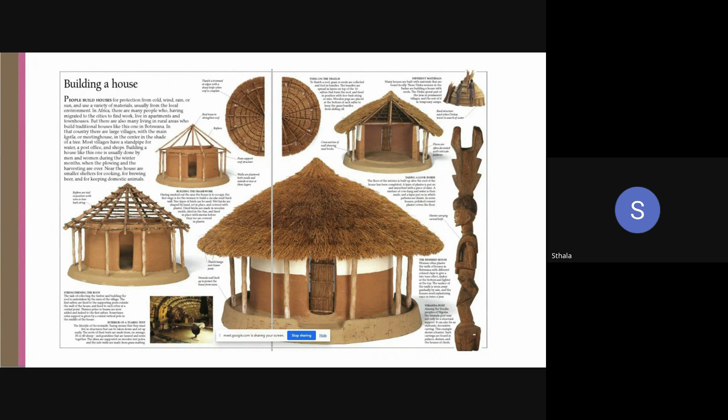It was really that thin layer that separated them between the inside and the outside world, purely a structure built for collective survival. The materials were very common, easy to source, and the fundamental theme was collective survival.

The idea was how can we separate ourselves from the outside world, from the weather, from the animals, from anything harmful, and just provide a space which is warm and easy to accommodate for the family in whatever climate they were in. The hunter-gatherers kept moving, so they didn't have the idea of permanence—it was about creating the simplest structure in the quickest way possible to house the family and give warmth.

So a simple structure would have the female side on one side, the male on the other. You would have the ceremonial hearth, where the central heat of the house is generated, and small corners where the woman or the man would be seated—but it was all the idea of collective survival.

Everything used to happen in one space. The same space was used for warming, for making food, for drying grain. Occasionally livestock were also kept in the same location—if there were cows or chickens, all of them were housed within the same shelter.

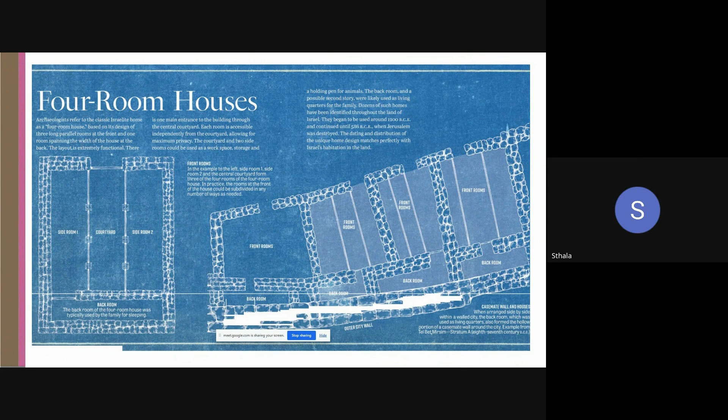For example, in this house a woman would be bathing the child while the cattle would be at a corner, and in another house maybe the cattle is in the middle. So there was never a primary function given to the walls or separations that were created—it was more the idea of segregating spaces that evolved.

As we move forward, especially in dwellings in Mali or even in early civilizations like Riyadh, you start seeing that this slowly evolved into specialized rooms. There was an idea of having a living space where people would gather, sit, eat their meal, talk to each other about the day. There would be an idea of a granary to store food, and also the idea of a bedroom with the specialized function of only sleeping. So there was suddenly the main factor of privacy, which became fundamental in how the housing developed.

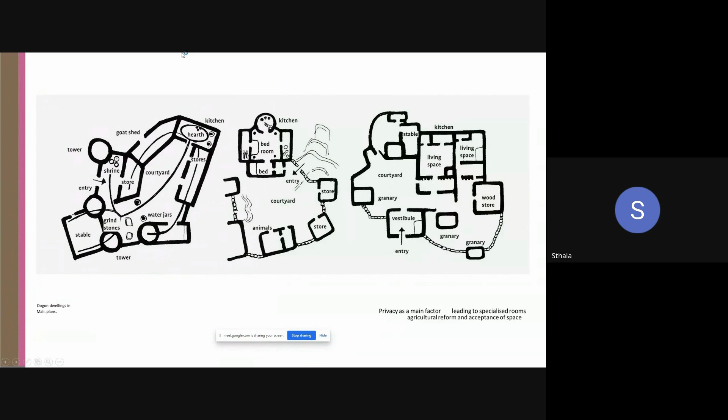As the agricultural reform came into picture, the hunter-gatherers slowly started accepting one space as their own. That is what led to the idea of, if I have this one space, I would like to have multiple specialized spaces within it in order to aid a certain function.

As you move forward to the next century, the idea of permanence seems to settle more in how people are building their houses. The use of rock, the use of closed spaces, the introduction of fenestrations or windows of different kinds to cut out the natural light starts becoming a theme. Suddenly furniture starts to be something they introduce into their houses as well.

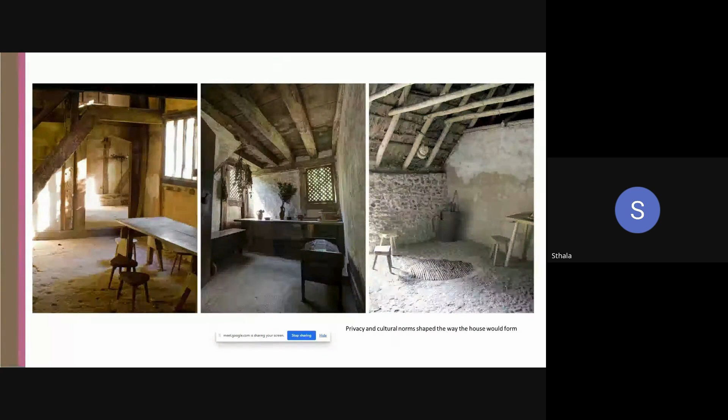The privacy and cultural norms form a way in which the house would slowly develop one by one. As you move forward, although the house becomes the private space where they inhabit, suddenly the public spaces become a place for people to gather as well. The Roman baths, for example, very well known for women to gather around, have a central space where bathing would happen. The same with the Turkish baths, or the step wells in India.

This changing evolution also led to how the external amenity spaces that each of these civilizations perceived also grew. You can suddenly see that amenity spaces became secondary spaces from home, where people would move out, and the city would become an important part of the development as well.

Another really important milestone towards housing development was the introduction of corridors. As colonization came into picture, and as the idea of classism came into a lot of European culture, the objective was that servants or slaves were not required to traverse through each and every room. They could move only within the corridors, and the main inhabitants of the house or the aristocrats were then present with their own specialized rooms, and they would just go in and out as needed. That's when corridors completely changed the way that people could live.

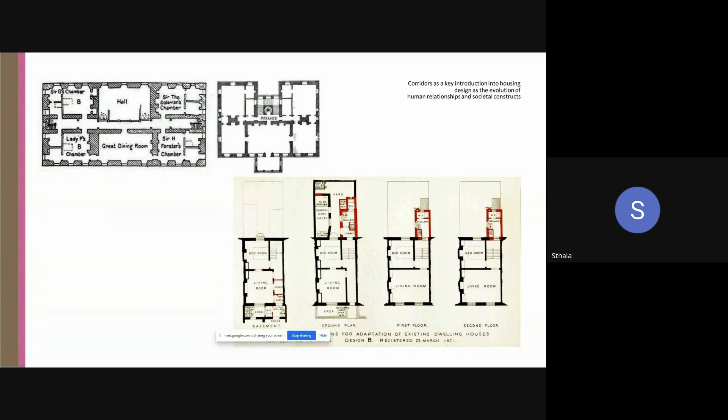How can we then go multiple levels using staircases, and how can corridors aid a kind of living where there was a segregation caused by class? The societal constructs and human relationships that were built in that era were fundamental in the development of housing at that point.

As we hit the early Renaissance era, people started personalizing their space. It was no longer just about the walls of the house, but the grandeur of the house. It was about the culture they came from and the culture they are staying in. Suddenly it's about how we can create spaces which are more personalized - how can we get artifacts from our hometown, or bring artifacts from where we are staying into our homes, and create that sense of grandeur or extravagance using these houses.

That's how each space then started getting its own charm and character. The living spaces were decorated in a different way to the dining spaces. The more public spaces were decorated with slightly more grandeur to show off, whereas the more personalized spaces were done so in a different manner - probably charting the first evolution of how interior design came into picture in housing as well.

As we move forward, we then go into the Industrial Revolution, where the idea of man going to factories or going away from their home as part of their work became an important factor in how housing was formed.

When men used to go to the industries, they were completely covered in dust, and they had to come back home and wash themselves. Therefore, the evolution of the bathroom, another private space where the man could wash off the dirt away from the children, away from the rest of the family, so that they are not polluted at the same time. Sanitation became one of the main reforms as part of the Industrial Revolution, and that led to the importance of specialized rooms and their uses.

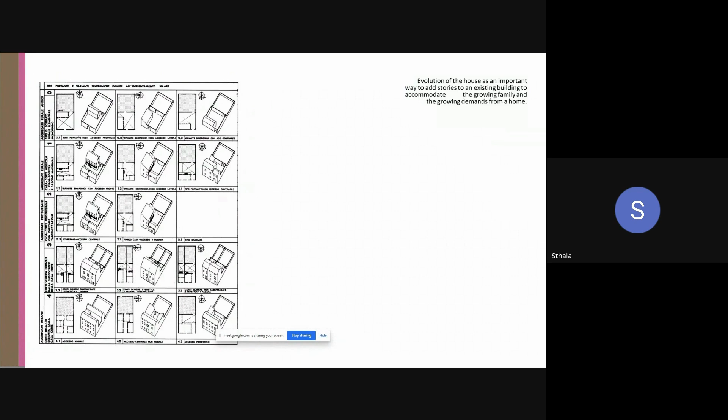That led to the evolution of how city planning has been influenced by housing design, especially something you notice in European cities. That was also an important aspect of the staircase, how people move from one floor to another, and how that led to privacy. Each floor had a certain level of privacy as they moved above.

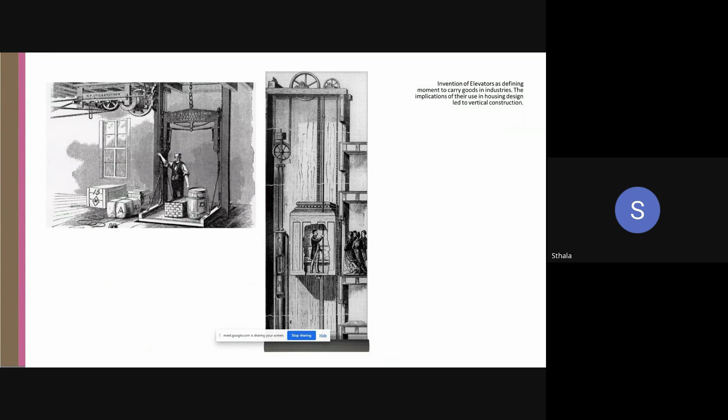And then, obviously, one of the most important factors was the elevators. Elevators were usually used only in warehouses, where they took very heavy loads up and down for goods and materials. But the utilization of those elevators in the housing context enabled the housing to go more vertical, predominantly seen in the US, where you can see New York, Chicago, those kind of places where the elevator gave them the ability to go vertical and wider.

Therefore, more houses could be accommodated within a smaller space, more blocks could be accommodated in a smaller space. A lot of manual elevators also existed back then. This is one of the oldest ones in Chicago, which then gave people the opportunity to spread across different floors as they go on.

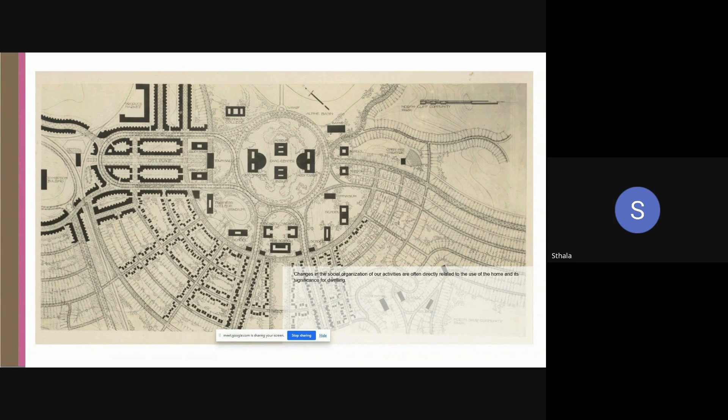So the women were confined to these areas, and they would leave their children at school, for example, while the men go to work. You can see how housing design has fundamentally played a role in how citywide planning or citywide scale has been developed in different areas.

Cut to the 1900s and the post-industrial revolution, you can look at modern homes where the introduction of automation was the key factor in how homes were developed. Suddenly, there was no longer a requirement for coal to be burnt. Therefore, there was no need for the kitchen to be segregated from the rest of the house. You could have an open plan kitchen right next to your working area, because the machines used to do the majority of the work, from cleaning the vessels to cleaning your clothes.

Open plan became something romanticized with the idea of automation and the industrial revolution. Moving to today, we've come full circle along with technology, where you now have smart homes, where everything can be controlled with one device, from your Wi-Fi to something that's making your roti. Each sort of space or amenity we saw earlier, split out as bathing areas or gymnasiums in Rome, suddenly now they are part of the same house.

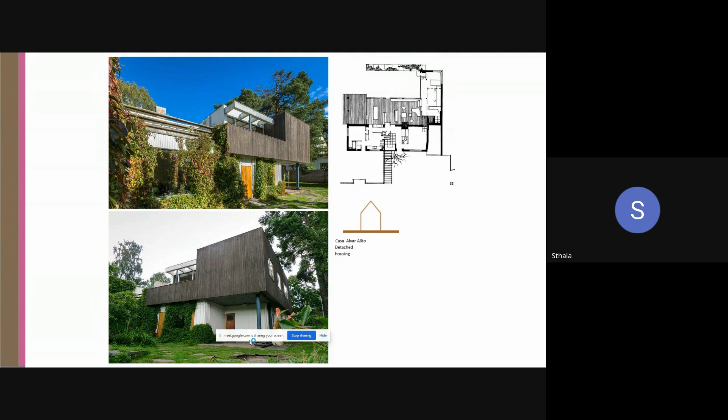What you can see is these facades, along this image. The facade is quite transparent to allow that interaction with the outside. So when you're looking at spaces like living rooms, dining rooms and kitchens, they might want that sort of external interaction. But the minute it comes to other spaces, like bedrooms and bathrooms, or other private study rooms, they would want more permanent built walls around that area. So you can see the difference between this facade and this facade. That's where we start categorizing how each of these types get differentiated from space to orientation and the amount of exposure they have to the external side in terms of facade treatment.

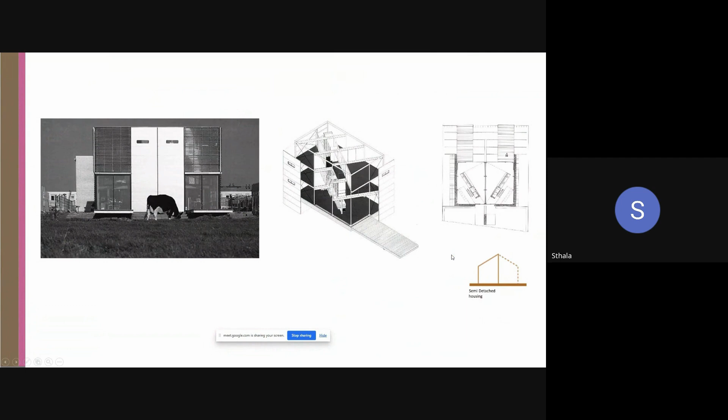As we combine multiple zones together, in this case we look at this as a single zone, and then we move on to semi-detached housing. You start combining two of these zones together, and you create a sense of interaction, encouraging people to interact between these two units. So you start having common spaces, as you can see within these areas, within back gardens or within those back zones, and a sense of interaction is developed within those areas.

Similarly, as we move forward, you start seeing combination of multiple units or multiple zones being put together. Here, what we're seeing is clustered housing, row houses, which are combined. As I mentioned earlier, there are several factors: space, orientation, and facade treatment. Orientation is for the amount of light pouring into the units itself.

The space would be, say for example, a few people would like their dining space to be a private space, not with a lot of interaction outside. So then you look at areas oriented in a way that the amount of light pouring into those zones can be designed or structured around that. Similarly with kitchens or living rooms. This starts depending on the kind of culture you've grown up with, or what you want to show or project as part of your living. That's where open kitchens come into play, which creates a certain sense of space and also a sense of culture within that area.

For example, here we're looking at a unit that's vertical in dimension, say 6 meters by about 10 or 12 meters in width, oriented towards two directions, with a larger part of the openings there. So certain uses are structured towards the area where there's a larger opening, and certain areas which require privacy are oriented towards the area where there's less light pouring in, or no interaction with another unit. So this might face towards the street where there's interaction with multiple people within a development, whereas the other one might face towards the back garden.

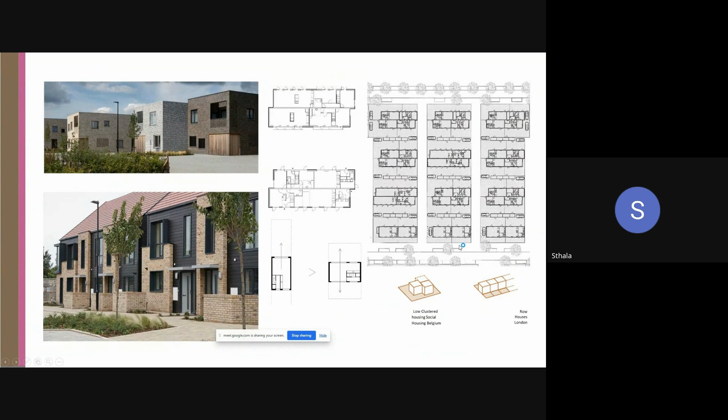Similarly, if it's oriented the other way, with a longer facade opening with a larger opening towards that side—say 6 meters towards one side and 12 meters towards the other facade—then you have a different sort of orientation. So what you see here is privacy tucked in here, but the majority of your units face towards areas or spaces which are open to that sort of interaction that you want with the outer side. That's a decision you would make with housing whenever you're designing row houses or individual units as well.

A combination of this on a larger scale leads to concepts around mat buildings, which is multiple houses laid out together.

Now it raises several questions in terms of the privacy that is set up, the amount of light pouring in. So when you're working with your housing dimensions, it starts coming into play. What is the minimum or maximum dimension that you work with between two facades? If there are opposing units, what are the dimensions you work along with?

That sort of avoids looking into each other's unit, or you would want it the other way where you want interaction. So if it's a living room facing a living room, you might narrow that space down to let that interaction between two neighbors happen. But if you want that to be a private space, you might increase the space between those units, to about 18 meters, or anywhere between 14 to 20 meters, to avoid overlooking into each of these units.

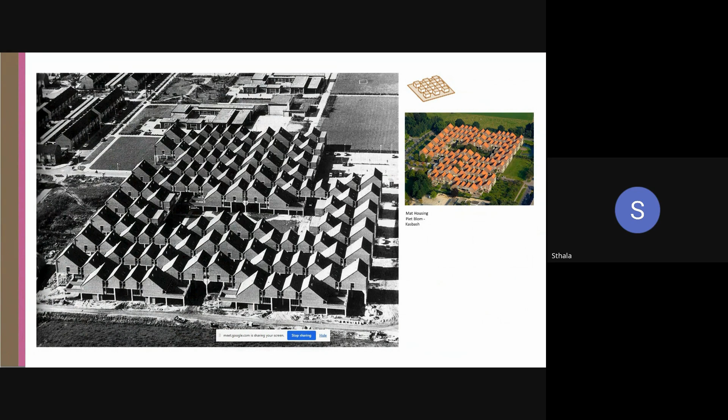So all of this starts playing an important role, and these numbers almost need to be at the back of your head when working out any housing project, in terms of the extent to which you can overlook into a unit, where the bedroom is located, to avoid privacy issues or get that privacy versus overlooking. All of these points come into play when you work on slightly larger units.

Similarly, when we start going vertical, as mentioned, the elevator and staircase have been a major shift in terms of innovation that helped us go vertical. But apart from that, as we go vertical, these units achieve more density, and more density creates a sense of more interaction - not even just a sense, it's a feeling - more interaction within a group, within a community.

So you might have like-minded people staying in an entire apartment, and everyone accepts that culture when staying in an apartment. When you're staying in a vertical building, you're accepting that all of you are going to get the same view, that all of you are going to interact at some point, and that this is what housing means when you're staying in a skyscraper building.

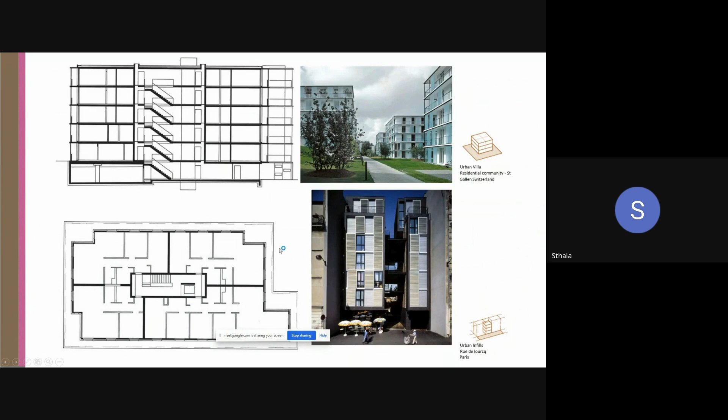So then there are questions around how you create those spaces where people interact. In this case, it's a simple narrow corridor which everyone's houses open onto. But as you split vertically, whether you create intermediary spaces or not, a balcony - a continuous running balcony - or a facade becomes the point of interaction that you might have with others.

Similarly, you also have openings at intermediate levels that can create those communal spaces. In an individual house or housing development, as shown earlier, you'd have common amenity spaces where people would pour into for that sense of interaction. But how do you incorporate that when going vertical, creating density and catering to urbanization, to the influx of crowds coming into each of these cities? All of these start playing a major role.

Now here, the last image I'd like to bring into focus is the size of the openings. As we go vertical, there's also the question of what size opening to give, how much light I want coming into each of these units, and how important a role that plays. You can almost start reading the entire orientation of the house from the facade and elevation. Each of these smaller openings seem to me like openings towards bathrooms, ventilation units. Then you start having larger units here, which could be the living room and dining room.

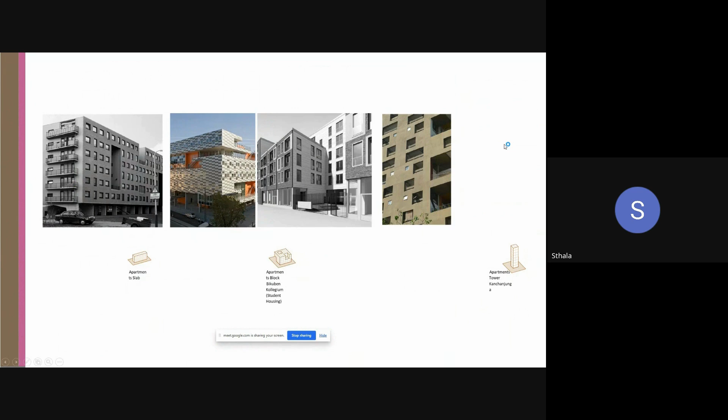So the elevation starts giving you a sense of what the arrangement is within the entire tall building itself. So I'll just reiterate this, where we talk about size, orientation, surface area, exposure in terms of the facade, and how all of these start playing an important aspect in whichever housing you do, whether it's a courtyard block, a point block or a slab, or even an individual semi-detached or detached house.

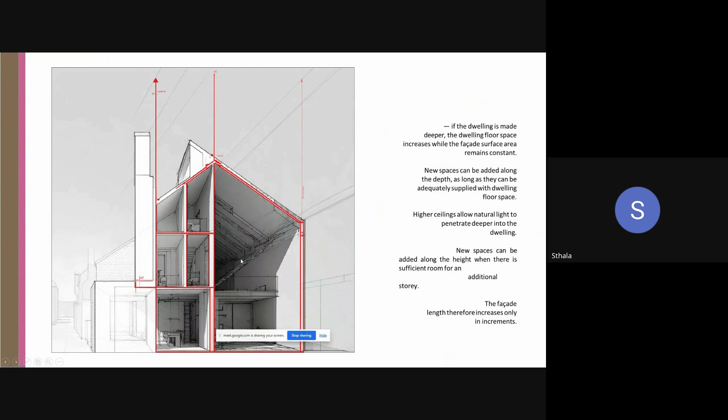I just discussed this point earlier, but I think what this starts showing you is when you work with certain facades, the amount of light pouring in, you almost start looking at those spaces with lesser amount of light, fixed with certain activities and fixed with a sense of privacy within those zones. So it starts working along those lines with whatever housing units you might work.

I'll go through a quick combination of the type of blocks and how each of these come into play.

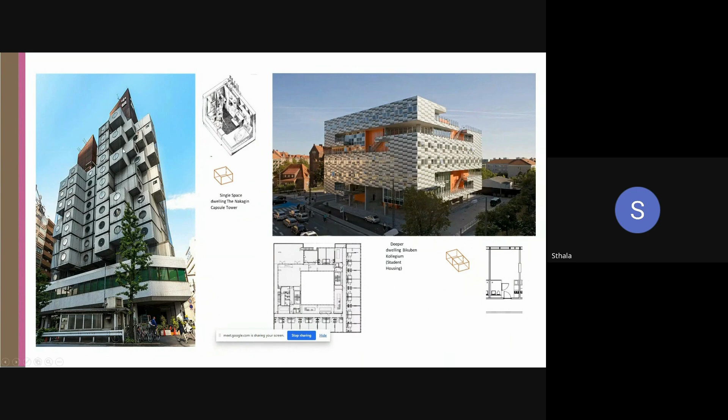Now, these are single space dwellings where the orientation of these are all single oriented towards one side. So what you can almost see is within the back of each of these units, you start seeing a corridor running past there, and that starts developing the entire unit into a vertical space itself. But these are single spaces oriented towards one side.

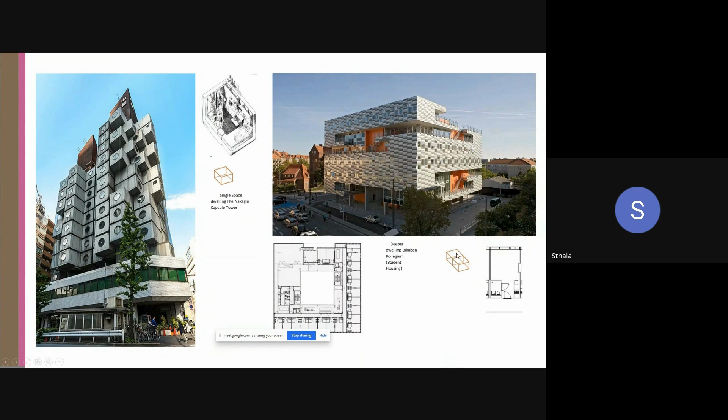Similarly, when you start adding deeper units, you start getting dimensions. I'm just probably taking a proportion here, you might have 6 by 12 meters in size, where the larger unit, the larger dimensions on the back side get lesser amount of light, whereas these start getting larger amount of light. So you start designing based on that.

Similarly, as you start going deeper, every site or context gives you a different complexity to work with. So in this case, when you're developing the layouts, you might end up working with something that has deeper plots, so deeper dimensions. One side might be about 15 meters, but this extent might be about 40 meters. So what you're seeing is the deeper unit.

So how do you start getting light into those in-between units? Then you start having scoop-outs or cutouts within those spaces. As you can see here in this apartment, you start having those cutouts that help you with, again, the 3 points: one is the surface area exposure, the orientation, the type of space there, and the area and the use that you're catering to.

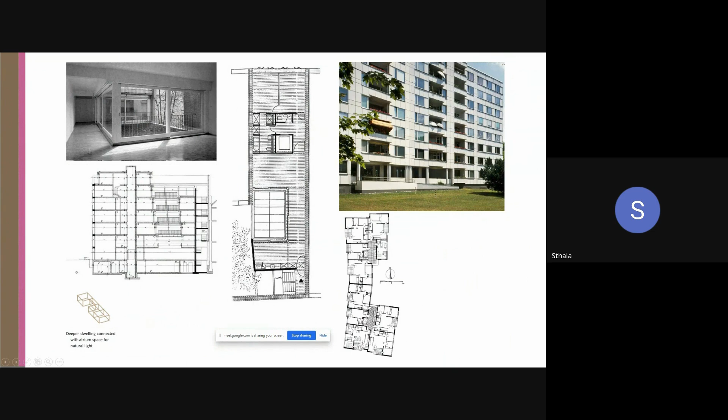I'll probably put in perspective the same discussion with this point. So you've got rooms here which have external interaction within that zone, and then you've got a kitchen located within this zone, and a bathroom located here within that darker zone that might probably require privacy within the entire unit. That's how you see that space worked out. These are bedrooms, and these could work out as dining and kitchen areas, which are exposed to a larger amount of light coming in. So it helps you plan individual units and also how you go vertically onto higher floors.

Similar different arrangements with the slab. Now the slab creates a particular effect - when you design a linear block or a slab as what we've seen here, you're clearly saying that the unit's going to be oriented towards two of these sides, and you are creating a hard stop there. So if you have a street running here with a slab, with this typology you're almost saying that people cannot view onto the other backside of what is happening behind that.

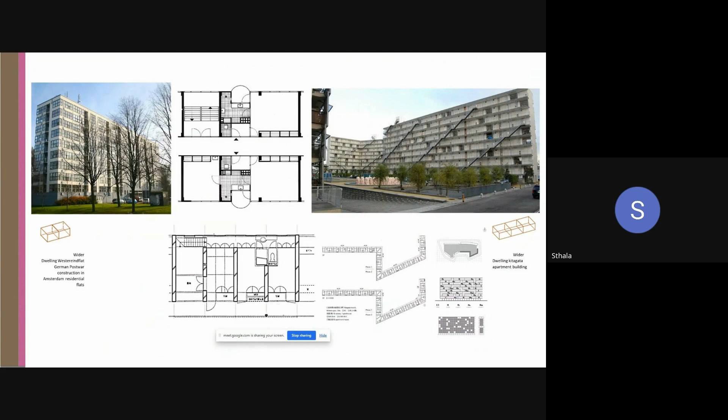And then the interaction is going to be between units which are serialized like this to create a density, to create interaction between each of these blocks and units, and if you want a certain kind of orientation within your entire development. So what you will see in these blocks, as you start combining from one zone, you start developing into 4 or 6 zones, there's almost a necessity to start creating a courtyard, a larger open space amidst what you've got on the plot, to have that amount of light pouring into the units. Now within those, that can be single oriented or double oriented.

So these dimensions start working as well. If you're looking at one set of units on that side, one set of units on this side, understand what's the dimension at play: 18 meters, 20 meters, 16 meters with a corridor in between. So your corridor is going to be dark and dingy within that area, and then you've got these units on one side and those units on the other side.

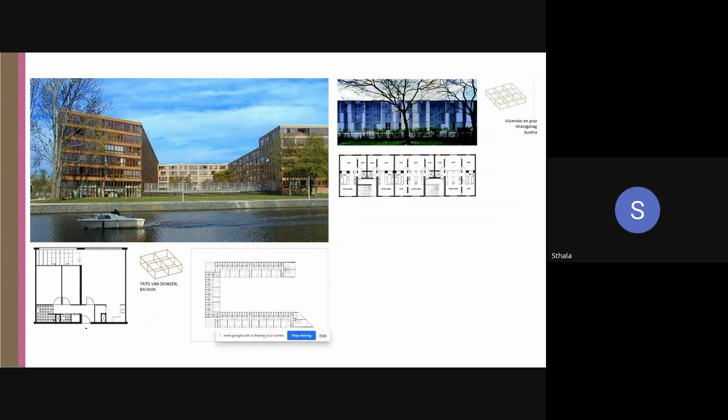So all of this comes into play when you're going vertical on a skyscraper or on anything that you're working, any type of multi-storied housing that you're working with.

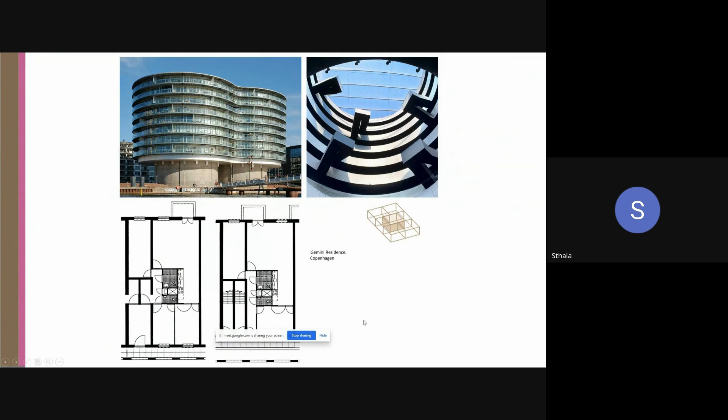Similarly, other examples of showing these cutouts in between help with light pouring into those units. In this case, you can see there's a corridor running all around the entire open space. So all of these units, as soon as I look at this image, I know the rest of the units are all single oriented, and that's what you start seeing in these drawings as well. You see an orientation towards that side, and that almost becomes the corridor where you wouldn't have much light and orientation, much light coming into those areas.

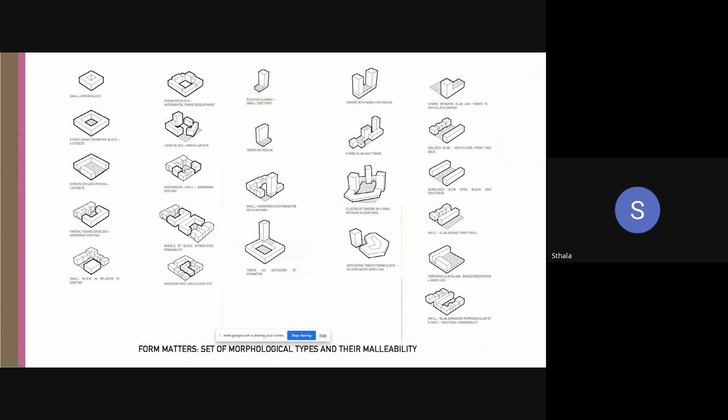So whatever you design, whichever blocks you put together, you are dictating how a person would live in that block, in that building, and in that neighborhood. And it also works the other way around, where that person, whoever's moving into that space, is accepting that culture, is accepting that as a space of living that you're going to live with.

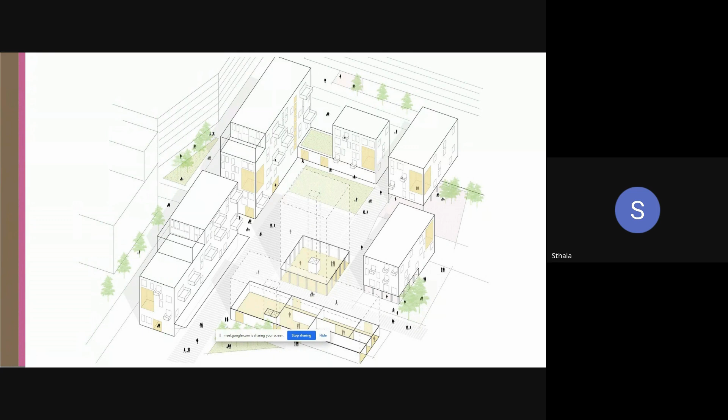Similarly, you might have these blocks and their space of interaction happening on the rooftop. So it's to show that a lot of these spaces can come together, or a lot of the blocks can come together for you to create types of buildings, and what sort of environment you would want to create.

Similarly, now we need to start thinking of how this starts scaling up, because the minute you draw it out, I think you need to expand your focus apart from the red line boundary that you always see any architect working with or anyone working along with. So you need to almost start looking at it from a wider perspective, because you start interacting with buildings and with the surrounding area.

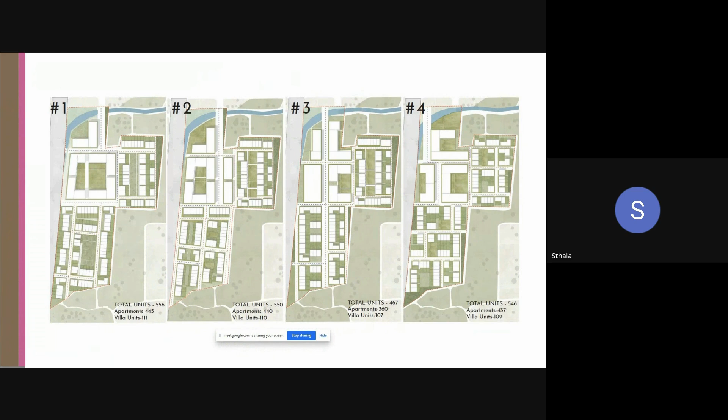So this starts combining with your houses. So what we try to elaborate on is the humans, the natures that I spoke about, and now with these spaces and the types of spaces, we're developing a certain type of culture within each of these layouts.

You also start providing larger communal spaces to cater to the number of units you might have within that area. So you might be catering to about 50 units per hectare for spaces with individual houses. But once you go into slightly larger units, you're catering to about 100 units per hectare as the total density you're developing.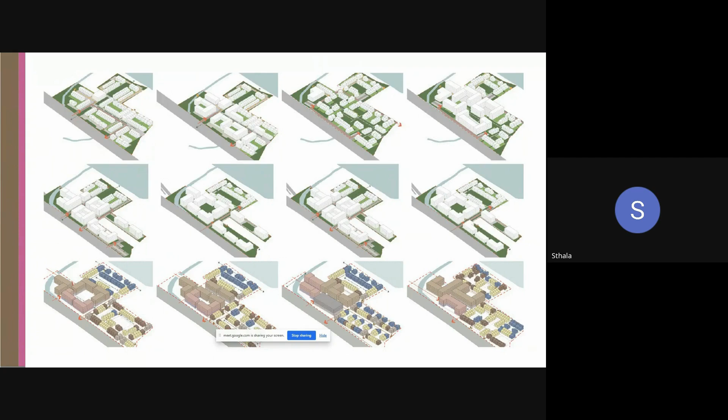Similarly, different other examples of how different houses, units, and communal spaces start coming into play. You can see apartment blocks, individual houses creating row houses with back gardens and larger communal spaces. You would have schools coming in between, or clubhouses.

So how all of that can come and fold together - because with this community, with the housing, you're creating an environment where people can access their school within 10 minutes of walking. They can access communal space within that area. Now, when you're working on a skyscraper, there might be a single use, or if it's multi-use, it's mixed use.

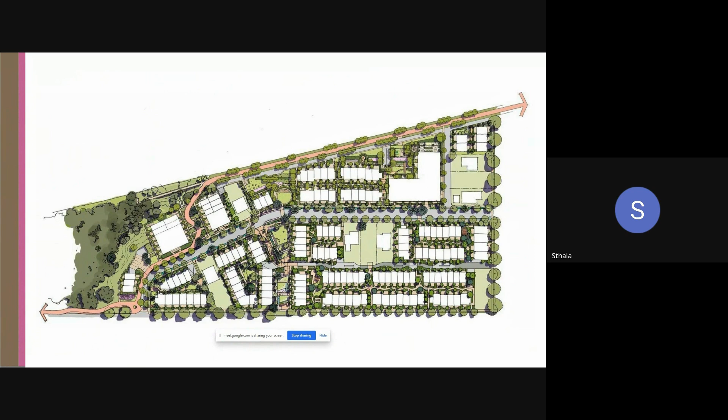How do people access those spaces? What is open to the public? What is private? There are a lot of questions you would need to answer when working on housing at any point of time.

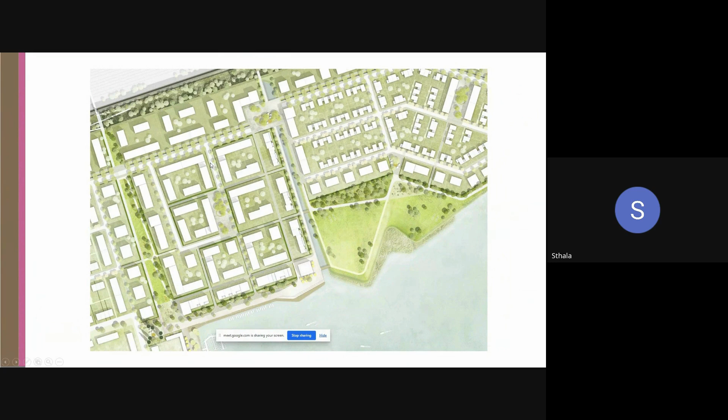Another layout shows a combination of different units - these are L-shaped blocks. These units, which are perimeter blocks broken down, create strong facades or strong streets along all sides. So you would place a perimeter block along those areas because there's an interaction with the street. But once you break it down into more permeable blocks, you're telling people you want them to walk through these spaces to interact with the larger green space. You walk through these units to access those spaces, and also create longer views for these blocks.

So I'll sum it up with this: dwellings in a sense are the structures that form the backbone, not just of your individual place of living, but also the backbone for a neighborhood, for a city. You need to assess that through culture and through how those spaces are used, and make your propositions or designs based on that.